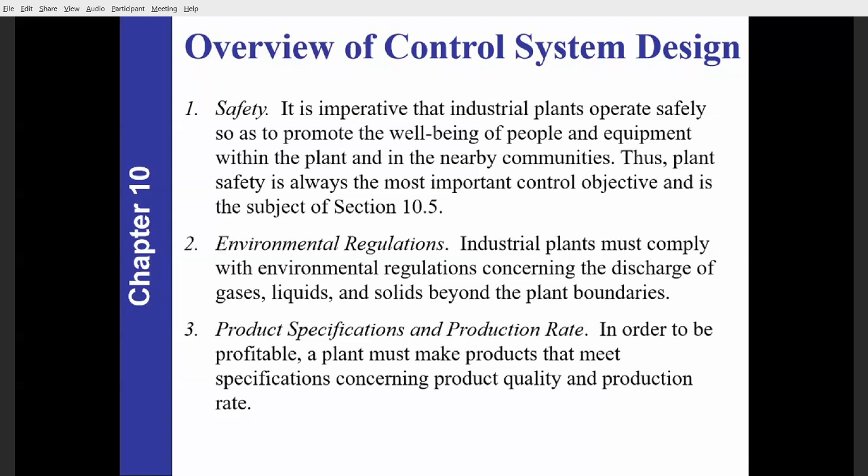Whereas the first 4 issues - safety, environmental regulations, community, and number 3 which is with regards to money issues, profitability of the plants - same goes for number 4.

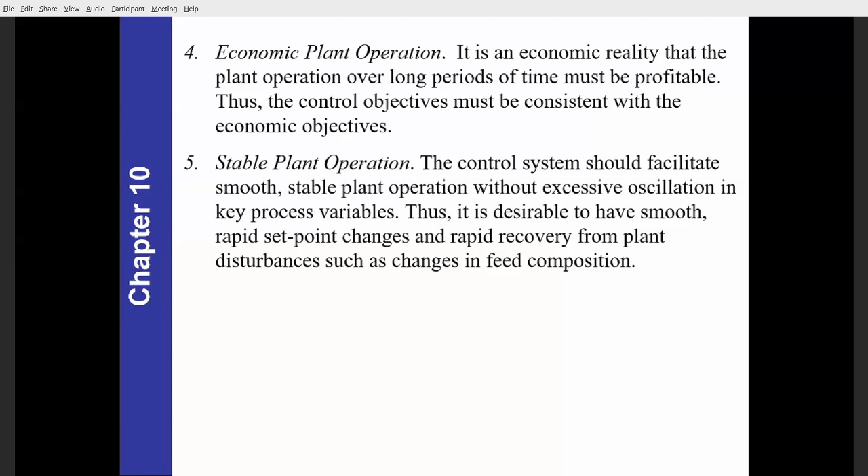But number 5 is actually what we have learned in the past, say in the past 4 or 5 weeks, when we studied control systems.

So let us look into the operator's view of process control. If you have the opportunity to visit a plant - a manufacturing plant or even a power plant like Batang Ai hydroelectric power plant or Bakun power plant, for example.

I think you already visited Bakun 1 or 2 years ago, did you? I still have that photo of Dr. Daniel - 2 or 3 busloads of Unimas students visiting Bakun power plant.

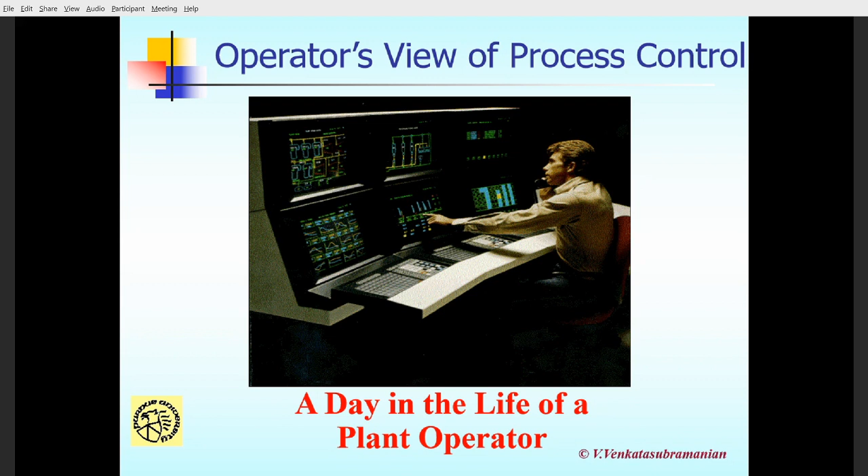So let's say you're in such a control room, for example in a power plant, such as Bakun, for example. Or in this case, we are talking about a control engineer sitting in a control room, monitoring the oil being pumped from offshore to onshore, for example.

In this case, let's say one of the pumps, pump A, has tripped, and from the monitor, the operator or engineer not only doesn't know what the cause is, but he has the option to switch to the other pump, pump B. So he can switch to the other pump from the control room there, from the monitor.

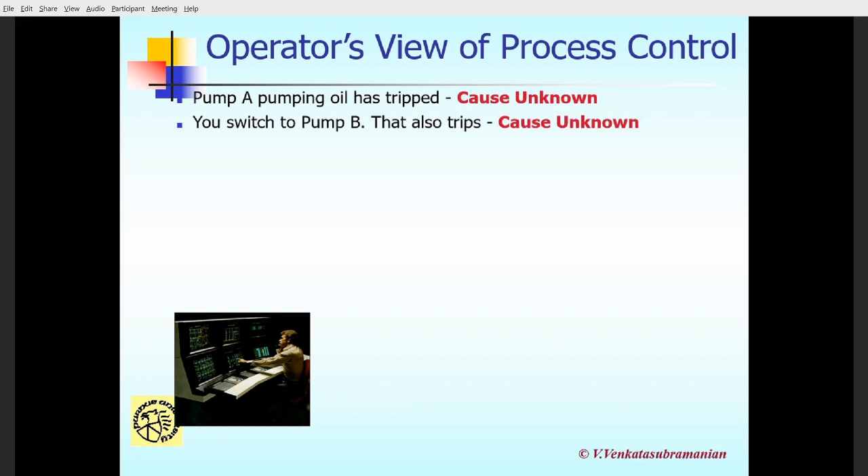He just touches the screen, and because A tripped, he moved to B. But unfortunately, in this case, pump B also tripped, and the cause is also unknown in this case.

And then because of that, the alarms went off, and they don't know why the alarm went off in this case. And in a few minutes, probably the controller or control engineer heard an explosion, and also saw fire in this case.

Probably people got injured. In this case, there were 2 people killed, for example, and a few hurt, at that particular time due to the explosion.

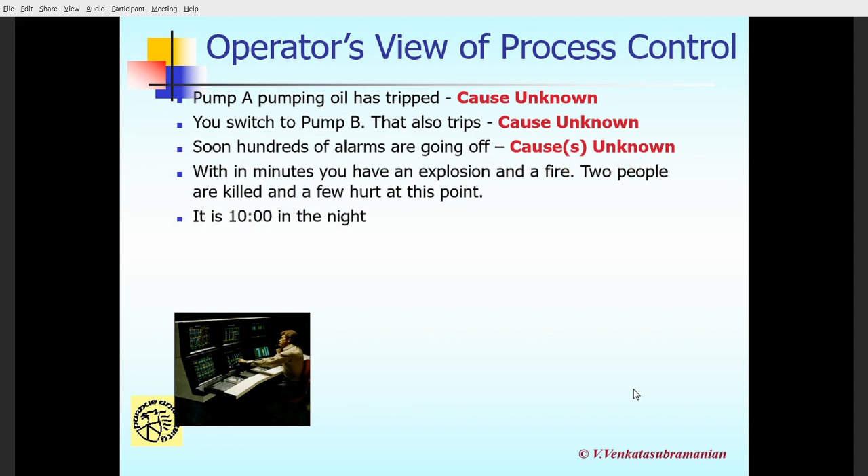And fire. And probably this happened late at night, in this case at 10 o'clock at night, when most of the people had already gone back home with their family. So most likely this controller or engineer was in the control room alone. He couldn't talk to another engineer to get a second opinion or to discuss the issue. For example, in this case, for this particular offshore-to-onshore pipeline, we are talking about Aberdeen, Scotland.

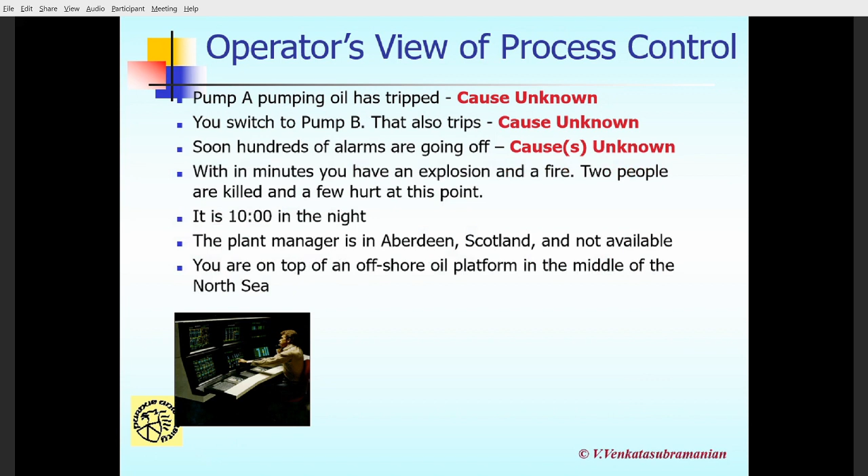Aberdeen is at the north of Scotland, towards the Arctic, North Pole, in the North Sea. The controller, being an engineer, is most likely the one in charge of this particular operation, so he needs to make a decision in this case.

Imagine you're at an offshore oil rig like this, probably 20 to 50 kilometers from the shore. The fastest way to reach you is by helicopter, since a ship or boat might take half a day from the shore. So as the person in charge, or the shift supervisor, what actually can you do? That's the question to be asked. What do you do in this case?

With a good control system in place, that explosion probably will not occur. If you have a control system ready for any accidents, because they've already considered the risk involved, probably the control system will connect directly to the authority. Like in Malaysia, talking about Bomba, for example, they come over. But in this case, they are offshore, so they have to come up with their own policy on what to do if these things happen. So you need a very good control system.

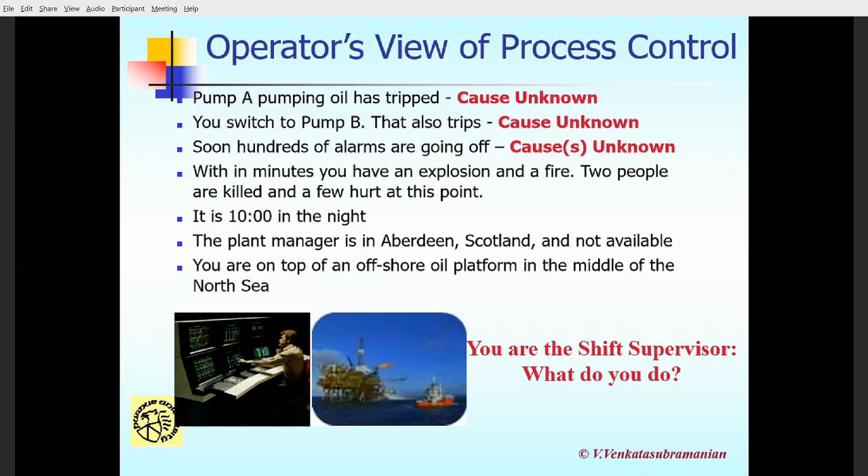So what is the motivation why we need a good control system in this case? One, to avoid the incident from occurring, and secondly, if it occurs, there must be a sequence on what to do to knock off the fire, to get rid of the fire.

There are a lot of process incidents that occurred in the past 20 to 30 years. For example, in 1988 in Scotland, similar to the accident just mentioned, a company called Occidental Petroleum had one of their oil platforms, called Piper Alpha, catch fire. The offshore rig exploded and many people, many engineers, were killed. As many as 167 people killed in that incident, and they suffered a $2 billion loss due to it.

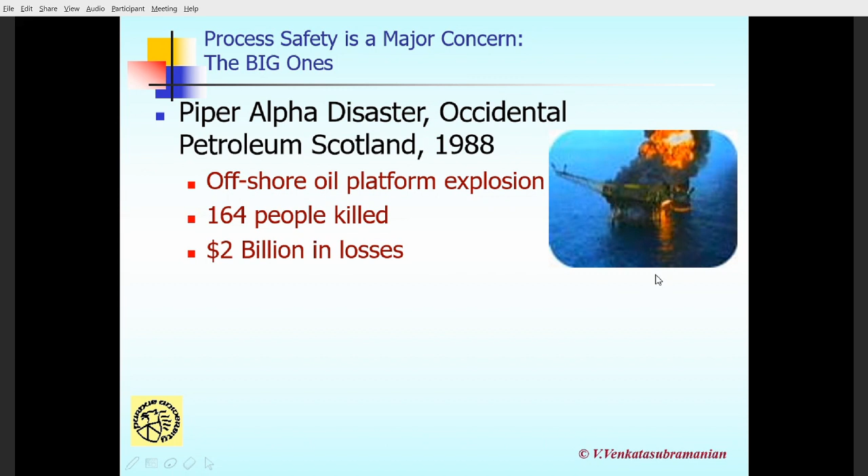This is how it looks, the aftermath of that incident, the Piper Alpha disaster in Scotland, near Aberdeen.

Another example, earlier than Piper Alpha in 1988, is the Union Carbide plant in Bhopal, India, in 1984, where a very poisonous gas called MIC gas was released into the atmosphere - nothing to do with MIC Malaysia, just the name of the gas. Compared with Piper Alpha, where only 164 people were killed, in Bhopal as many as 3,000 to 10,000 people were killed and 100,000 injured. Although they reported the losses at only half of Piper Alpha's, between half to $1 billion.

So you can see the difference between a developed country and a developing country, in how they value human life, you could say. That's the Bhopal, India disaster. You can see these comparisons - in the oil industry, big monetary losses although not many people killed.

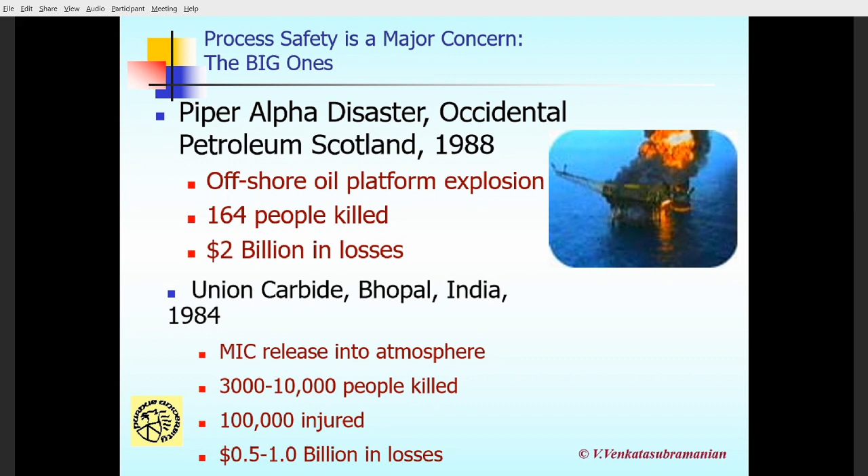If I mention back the Piper Alpha disaster, because of that disaster the procedures in the oil and gas industry were improved. So if you have the opportunity in future to visit any offshore rig, the standard operating procedures regarding safety are very strict because they learned from that experience, the Piper Alpha disaster in 1988. Oil rigs run by multinational companies like Shell, Petronas, etc. have very stringent rules regarding operations because they learned from this disaster.

There are many other accidents, for example in Kuwait in June 2000. In this case, due to leakage, flammable vapor was released and an explosion occurred, and as many as 7 people were killed and many injured. They reported $400 million in losses. Then in 2001 in Brazil, the Brazilian national company...

Petrobras - in Malaysia we have Petronas, in Brazil we have Petrobras - they also experienced an offshore oil platform explosion. In this case 10 people were killed, which incurred $5 billion in losses, and as a result that particular oil rig sank into the Atlantic Ocean.

When we talk about the Atlantic Ocean, we're talking about a depth of between 2 kilometers to 4 kilometers, so 2,000 to 4,000 meters depth, which is very deep in this case. One is saying you cannot recover it back.

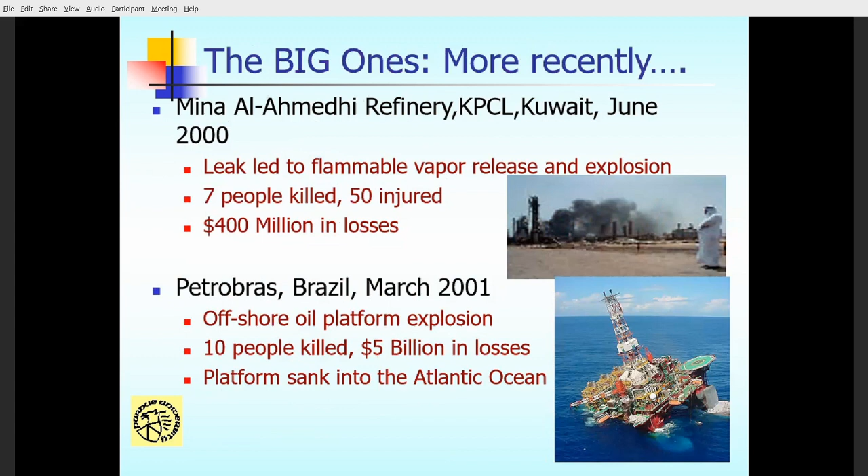If you follow the news, Petronas just came out with their oil platform built by the Koreans, early this year or end of last year, and that's one of the biggest of its kind in the world. They only operate at a sea depth of about 200 meters at the South China Sea, so in comparison with the Atlantic Ocean, it's 10 times deeper.

Then in 2001, also in France, in Toulouse, an ammonium nitrate plant exploded. In this case, as many as 31 people were killed and more than 2,000 injured.

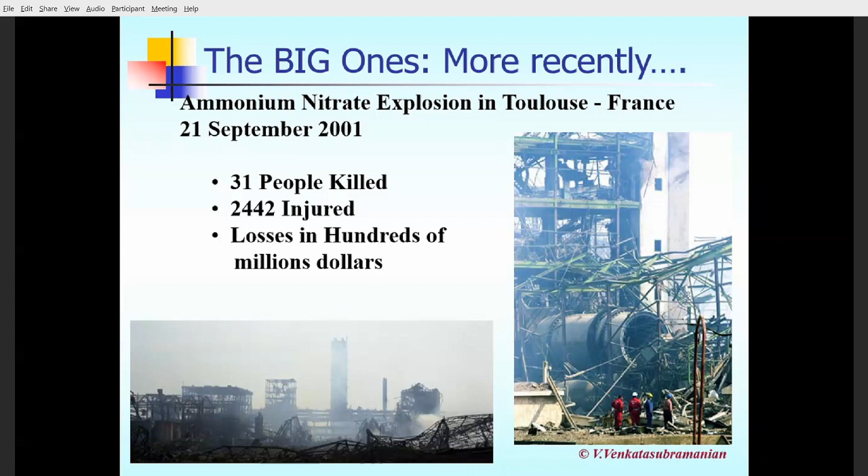There are also many other minor accidents, not just major ones, as listed here. Mostly these deal with the chemical industry, mostly oil companies - Mobil, Chevron, BP British Petroleum, Conoco - all those oil and gas industries.

All in all, recorded up to 2001, there were 24 incidents with 12 deaths, hundreds hurt, with more than 1 billion US dollars in losses, and the impact due to the incidents was more than 10 billion dollars.

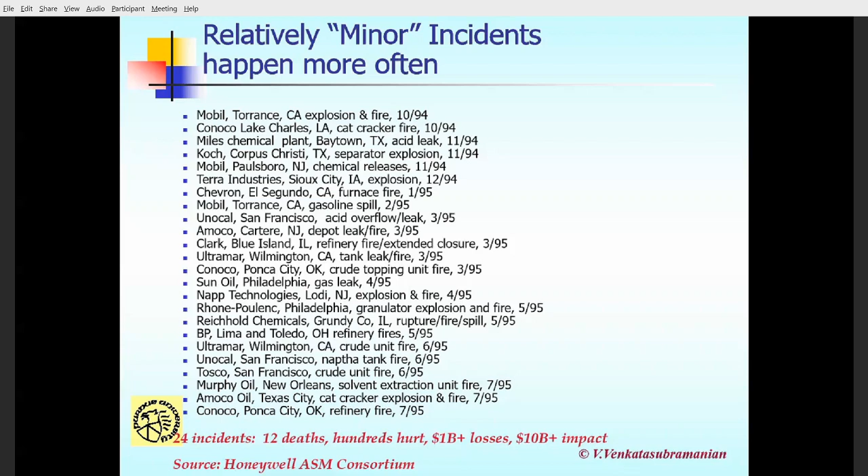So now, what are the problems, the important and challenging issues for a computer control system designer? It was reported that in the US alone, incidents incurred up to 20 billion plus dollars on the economy, and half of it was related to petrochemical companies. So these accidents - a billion here, a billion there - when you sum it up, it's really talking about a lot of money.

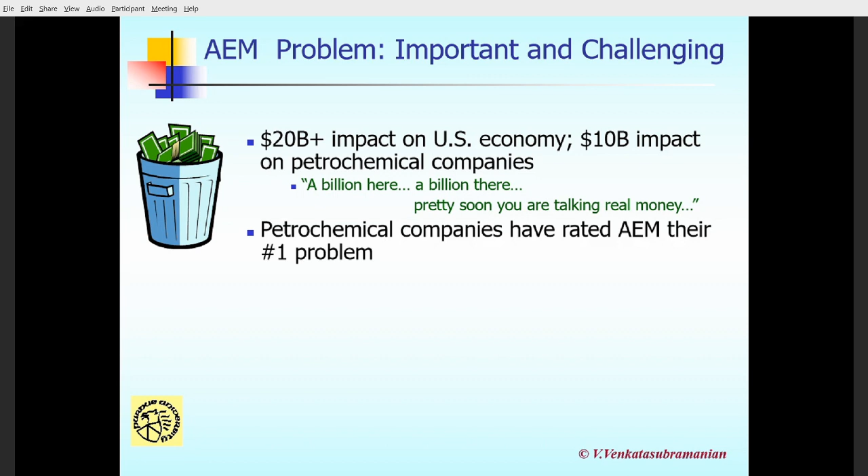So the petrochemical companies have rated accidents as their number one problem. The money basically went down the drain in this case.

So what we can say is that modern plants are more difficult to control, whether you agree or not. Why? Because modern plants are typically more complex in configuration and very large, large in scale. They're big in size, and running the process at its limit reduces the margin for error.

Normally this plant also requires plant-wide integration, so the things are integrated. You've seen how we looked at the dynamic system last Tuesday with the transfer function - from many series or parallel configurations it becomes only one transfer function, so in that one big transfer function there are many other small transfer functions. This makes reasoning very difficult.

Especially if you did not program it. So in this case, advanced control puts the process in states which operators have difficulty managing in the event of an upset, in the case of accidents.

They have fewer experienced operating personnel due to downsizing, especially like now when the oil price in the oil and gas industry went down. So what happened is companies start to retrench staff. Normally they tend to retrench the junior ones, and keep the experienced ones. But once the experienced ones are also retrenched, with few of them left, when complex issues occur, it's quite difficult for the company to react and address that kind of issue.

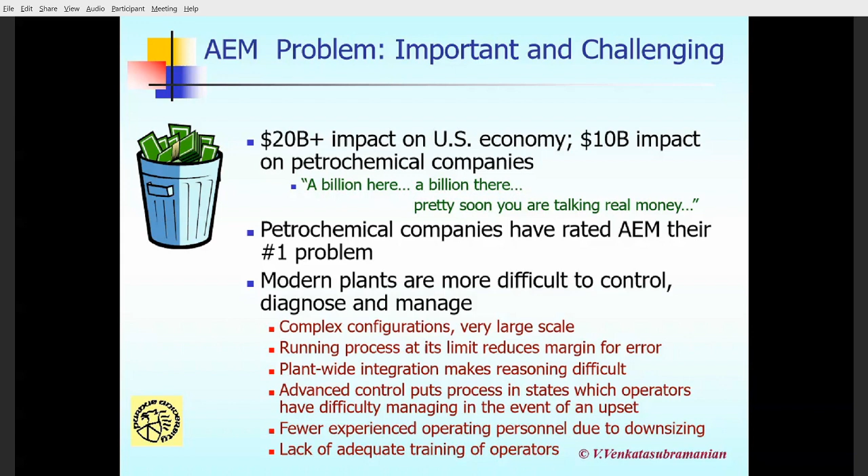What are the typical complaints from the operator? One, inadequate precedence or temporal information, or in other words, lack of true alarm order. Remember the first example, when pump A broke, the operator switched to pump B. When pump B also wasn't working, straight away an explosion occurred. Maybe in this case he just tried to figure out what to do next, not knowing why A broke, so he switched to B, and that led to the explosion.

There are also excessive nuisance alarms due to weak conditional alarming capabilities. I know one of my pilot friends flying an Asian airline from KL to London. Last time they used to fly the Airbus 380, the double decker one, but now they use the 777.

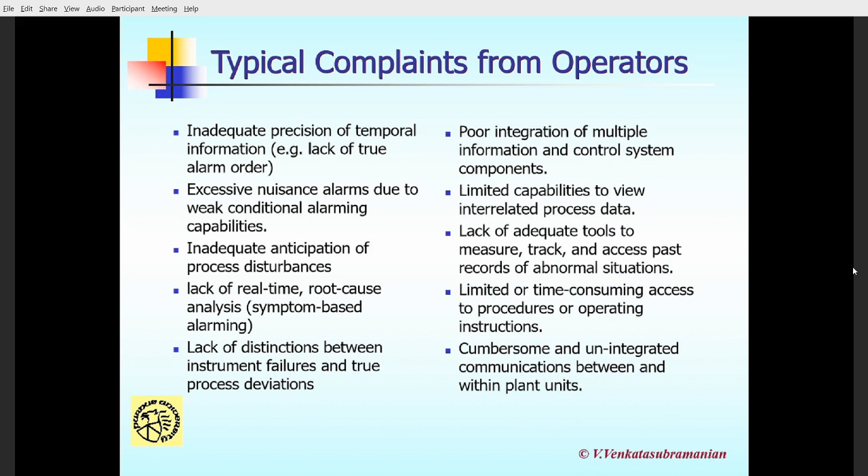Other complaints include poor integration of multiple information and control system components, limited capabilities to view interrelated process data, lack of adequate tools to measure, track, and access past records of abnormal situations, as well as limited or time-consuming access to procedures or operating instructions, and cumbersome, unintegrated communications between and within plant units. So these are some of the issues and complaints from the operator in this case.

So really, we can say that this complaint actually requires what's called intelligent control. We need intelligent control. In this Industry 4.0, the digital era of the 21st century, I'm pretty sure most of you have heard about artificial intelligence, for example.

I first read the textbook on artificial intelligence in 2001, more or less 20 years ago. At the time, for us, it sounded too futuristic. But 20 years after, from 2001 to now in 2020, artificial intelligence has become something like a norm. Try sending messages with WhatsApp, for example - if you send messages many times, WhatsApp will tell you that you cannot send to more than one person because it's already been sent many times, to avoid people spreading false news. That requires, in some way, intelligent control. Do you agree?

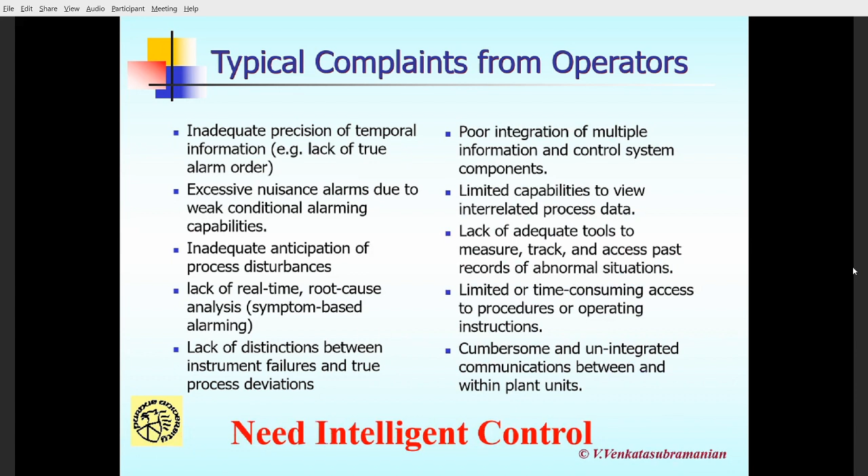So now we go back to the actual things - what we actually mean by process safety and process control. We're going back to the 5 issues we first discussed, because the overview of our control system is now with regards to process safety and process control.

This is very much the primary concerns of the process industry. We need to increase public awareness of potential risks, have stricter legal requirements, and address the increased complexity of modern industrial plants. From the Piper Alpha accident in Scotland, for example, operations on an oil rig have become very strict nowadays.

And then an overview of process safety. In this case, process safety is considered at various stages in the lifetime of a process.

So in this case, we need to look into the preliminary process design. This is basically what you have done in your assignment for plant research - looking at the preliminary process design with regards to controlling the power derived from the turbine somewhere in the middle of the sea, offshore to onshore in this case.

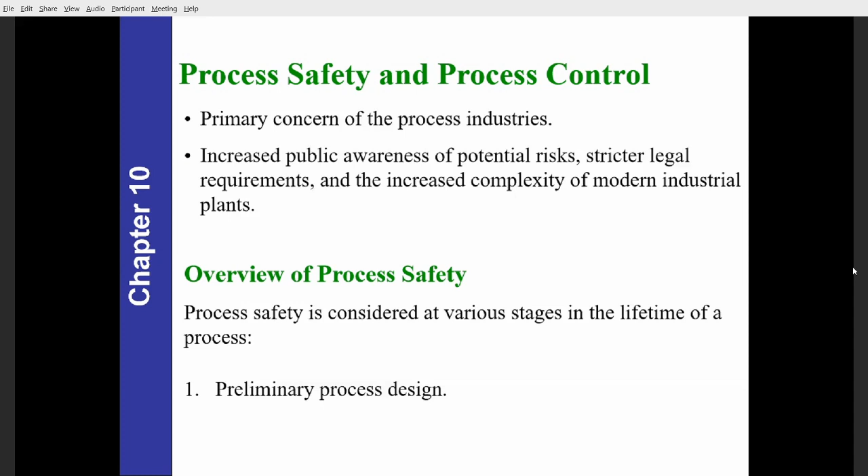And then at the final stage of the design, we need to consider hazard and operability studies, or HAZOP studies, as well as failure mode and fault tree analysis, being used at the final design stage.

And then third, after the plant operations begin, HAZOP studies will be conducted on a periodic basis in order to identify and eliminate potential hazards. These are examples of hazard studies we've come across.

For example, a plant wants to make a modification to the existing design. In this case, the staff need to learn how to handle the new design, so they will call in a consultant to come up with the HAZOP study. The consultant will talk to employees from top to bottom - from the manager all the way to technicians and mechanics - to find out the best way to improve the process, in this case the control process. That is the HAZOP study.

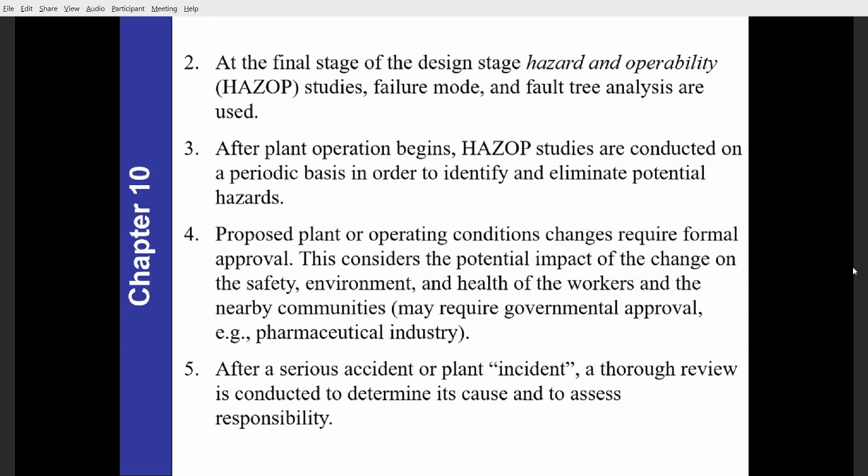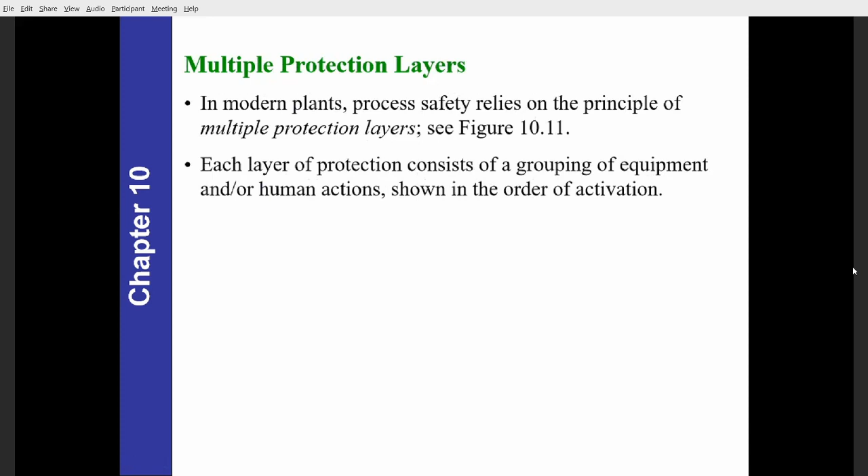So normally in modern plants there will be multiple protection layers. Process safety relies on the principle of multiple protection layers, where each layer consists of a grouping of equipment or human actions shown in order of activation. These are typical layers of protection in a modern chemical plant: in the process design itself, there is basic control with process alarms and operator supervision, followed by critical alarms, operator supervision and manual intervention, and then automatic actions.

And then we have physical protections. We have relief devices, for example relief air valves, to release trapped air so that pressure is not built up in the system. Then we had the plant emergency response, and finally the community emergency response.

The top one that you can read is the community emergency response, here in case of chlorine gas leakage, for example.

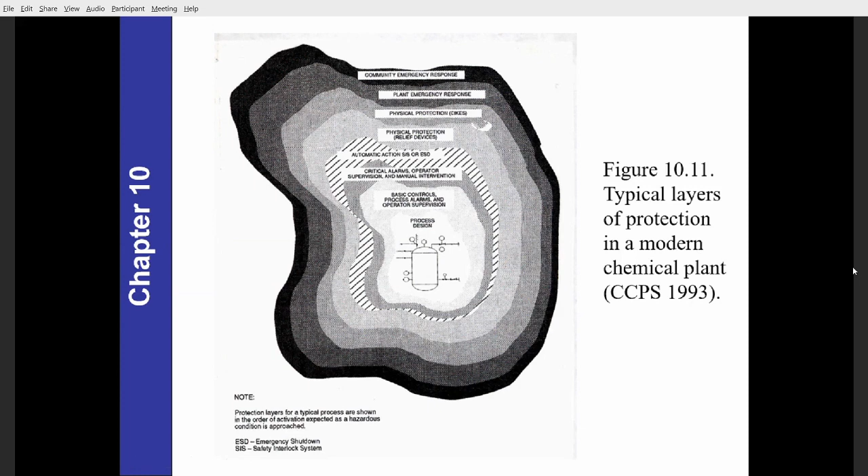So the basic process control system, or BPCS, is augmented with two levels of alarms and operator supervisions or interventions. An alarm indicates that a measurement has exceeded its specified limits and may require operator action. Then we also have the safety interlock system, or SIS, also referred to as a safety instrumented system or emergency shutdown (ESD) systems.

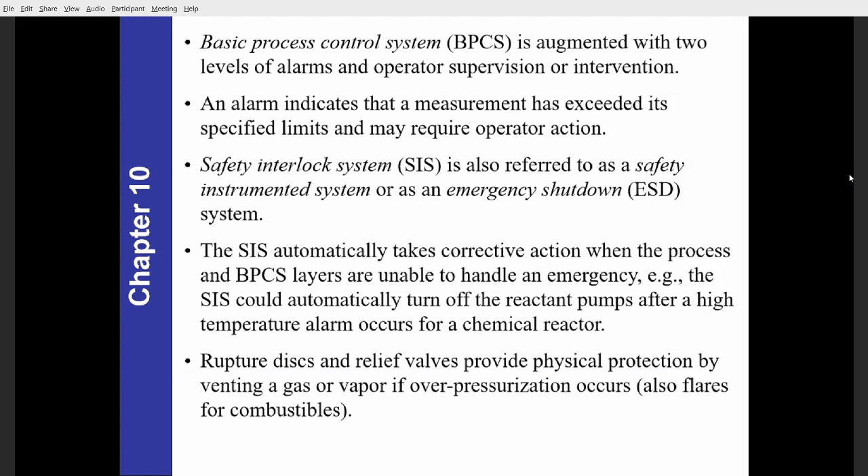The first type is the equipment status alarm, for example when a pump is on or off, or when the motor is running or stopped.

Then we have type 2 alarm, which is an abnormal measurement alarm. In this case the measurement is outside of the specified limits.

Type 3 alarm is an alarm switch without its own sensor, used when it is not necessary to know the actual value of the process variable, only whether it is above or below a specified limit.

Then we may have type 4 alarm. This is an alarm switch with its own sensor, and it serves as a backup in case the regular sensors fail.

And finally, the type 5 alarm, which leads to automatic shutdown or start up of the system.

So there are many types of alarms. Some of you asked questions while trying to do your group assignment on Lotus, for example whether it is the sensor that gives you the measurements. There are many types of sensors, including alarms in this case.

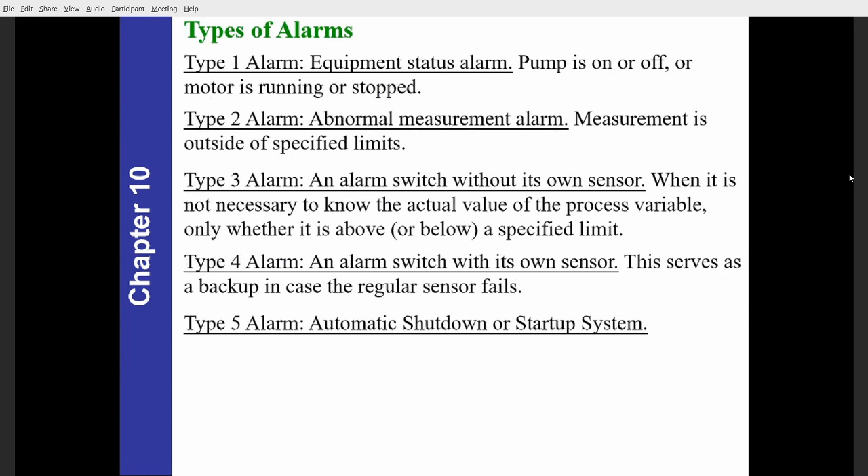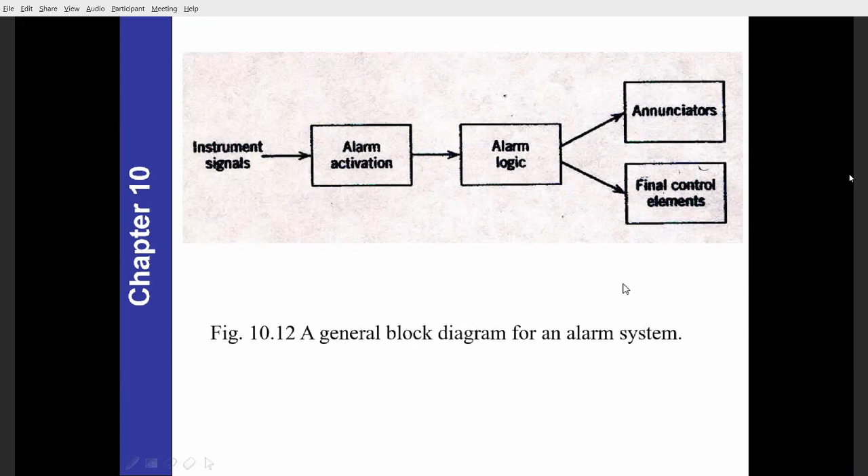So looking at the general block diagram for an alarm system, we have the instrument signals with the alarm activation, the alarm logic that leads to the annunciators, as well as the final control elements. This is an example of a two-level alarm configuration.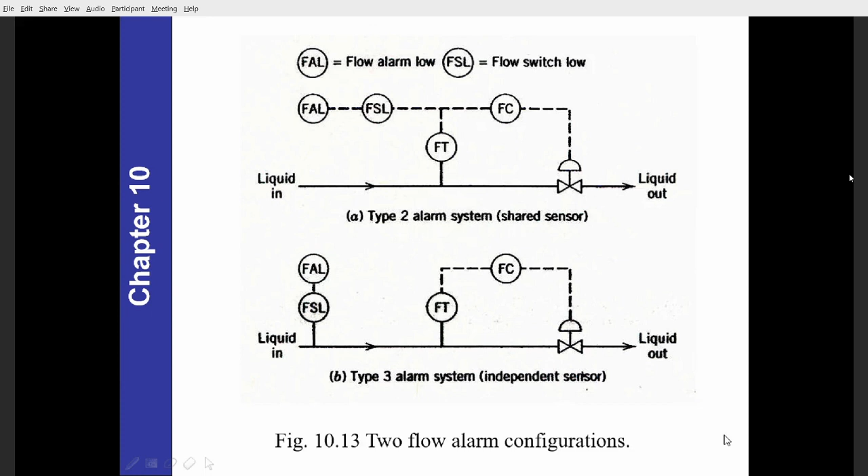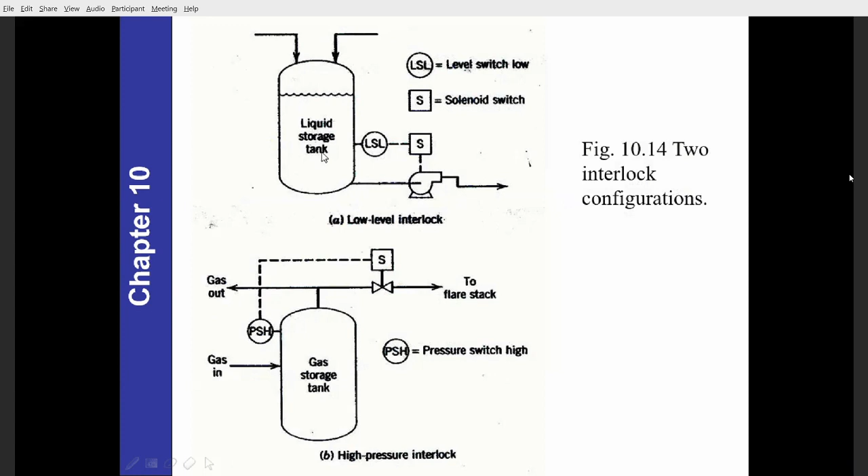Or with two interlock configurations as given here, about the storage tank, or the high pressure interlock, for example. So for the interlock system, the SIS basically serves as an emergency backup system for the BPCS, and the SIS automatically starts when a critical process variable exceeds specified alarm limits that define the allowable operating region, such as starting or stopping a pump or shutting down a process unit.

It's normally only used as a last resort to prevent injury to people or equipment. The SIS must function independently of the BPCS, due to a possible malfunction or power failure in the BPCS, and therefore the SIS should be physically separated from the BPCS and have its own sensors and actuators. So this is the real thing, you have to have it separated.

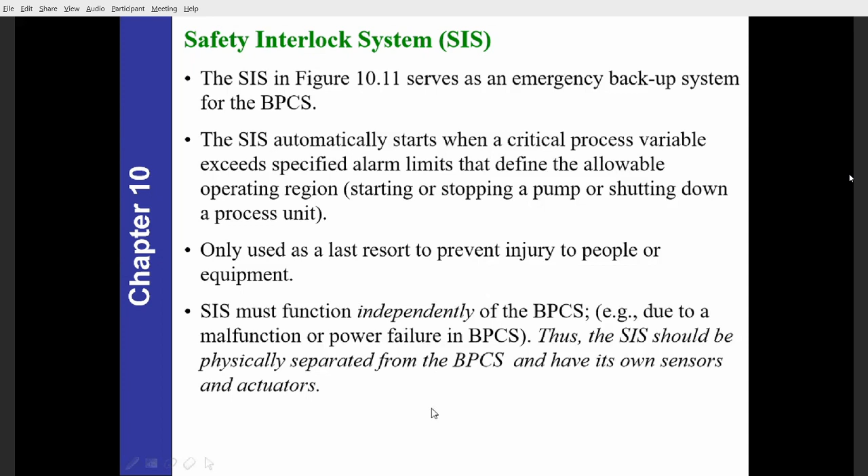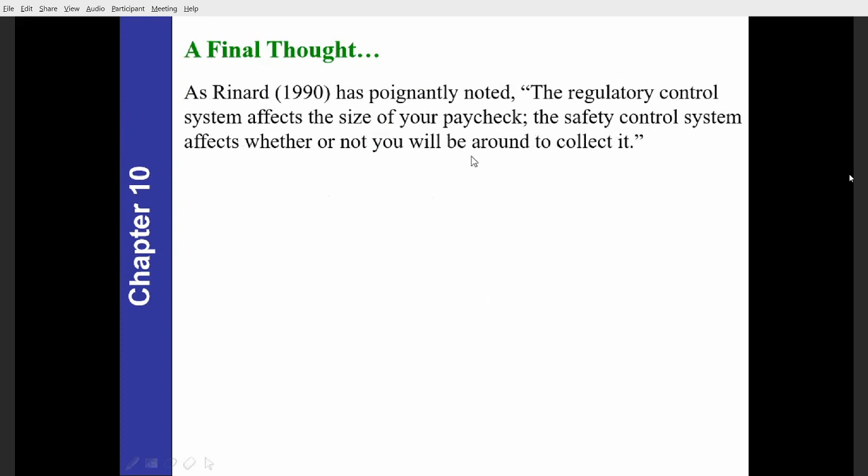And the final thought on the overview of control system design: people say that the regulatory control system affects the size of your paycheck, but the safety control system affects whether or not you will be around to collect it, which makes sense.